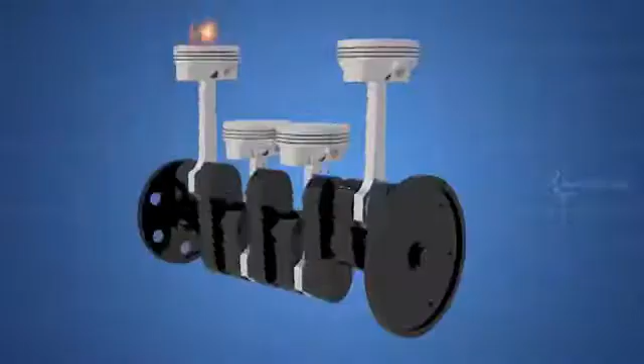Let's see how a car engine cooling system works. A car engine is basically an internal combustion engine where power is generated through expansion of high temperature and high pressure gases. A lot of heat is generated due to the combustion gas and the friction of mechanical parts. For sustained operation, this excess heat should be removed from the engine and kept at operating temperature.

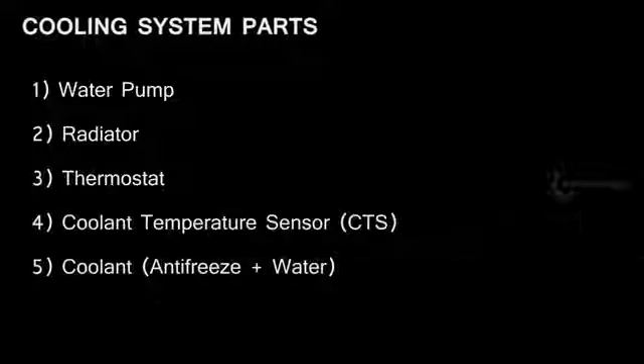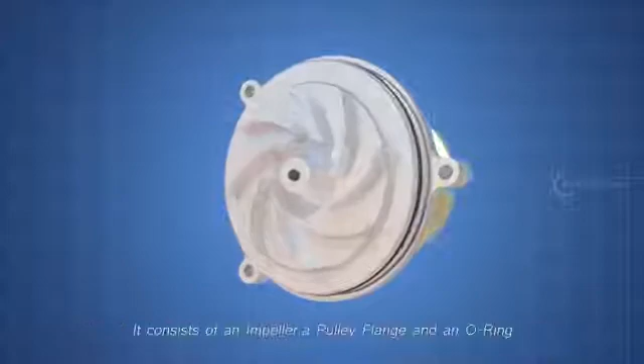Now let's see the parts involved in cooling the engine. The main parts for cooling the engine are water pump, radiator, thermostat, coolant temperature sensor, and coolant. First, the water pump. Water pump is the heart of the cooling system, which pumps the coolant. It consists of an impeller, a pulley flange, and an O-ring. The impeller is driven by the engine drive belt through a pulley.

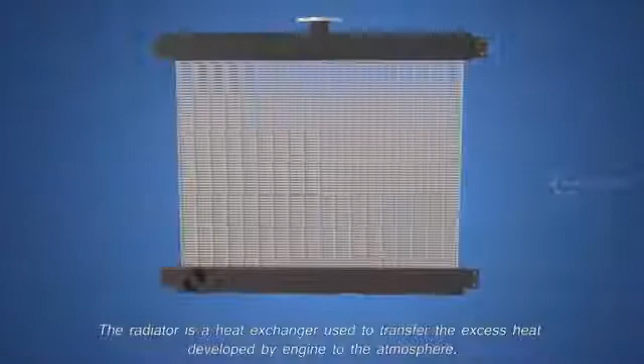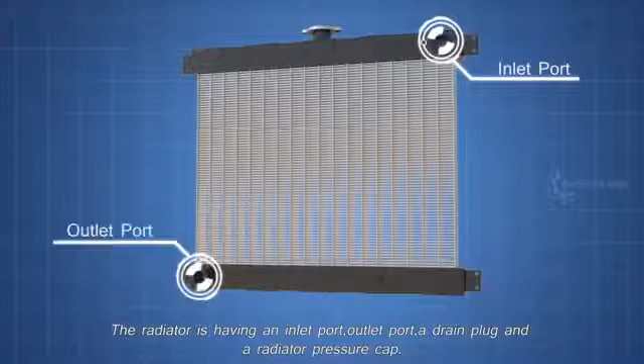Next, the radiator. The radiator is a heat exchanger used to transfer the excess heat developed by the engine to the atmosphere. The radiator has an inlet port, outlet port, a drain plug, and a radiator pressure cap. The radiator pressure cap plays a vital role in the cooling system, which will be explained later.

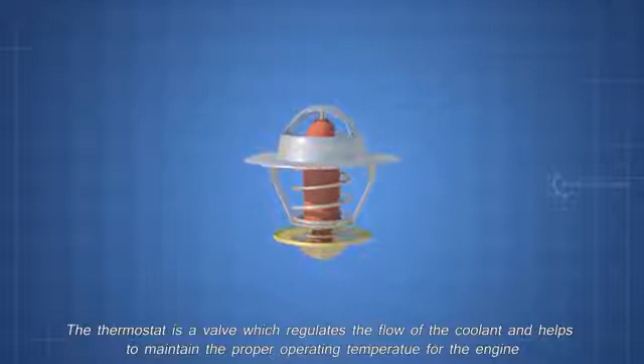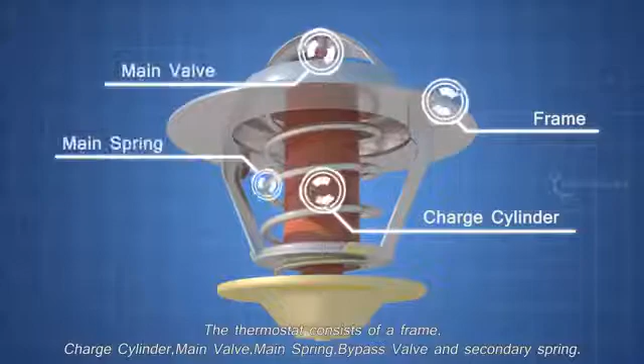Next, the thermostat. The thermostat is a valve which regulates the flow of the coolant and helps to maintain the proper operating temperature for the engine. The thermostat consists of a frame, charge cylinder, main valve, main spring, bypass valve, and secondary spring.

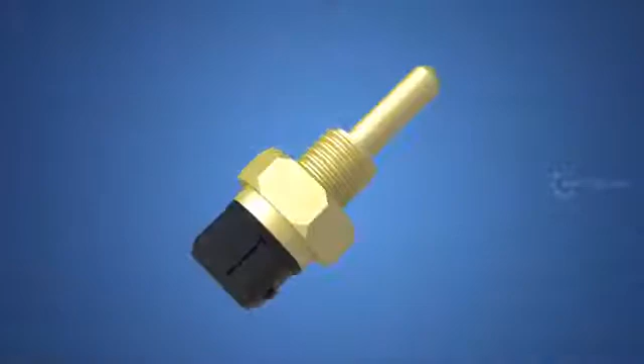Next, the coolant temperature sensor. The coolant temperature sensor is used to monitor the engine temperature. The ECU will use this data to manage fuel injection and ignition time. Some engines have more than one coolant temperature sensor. The data is also used to control the radiator fan and to update the temperature gauge on the driver console.

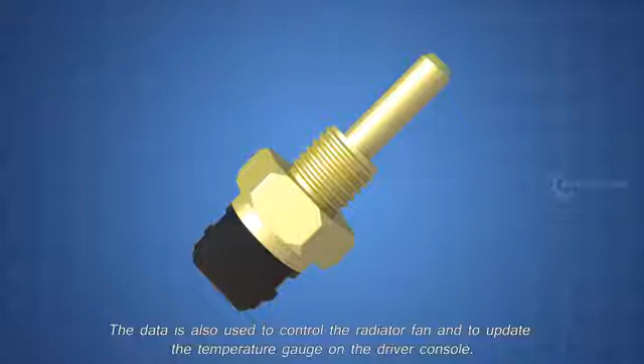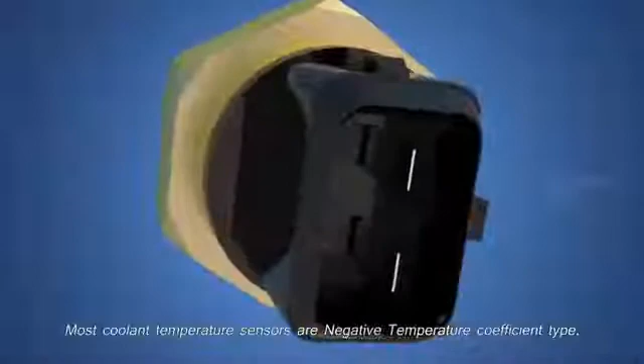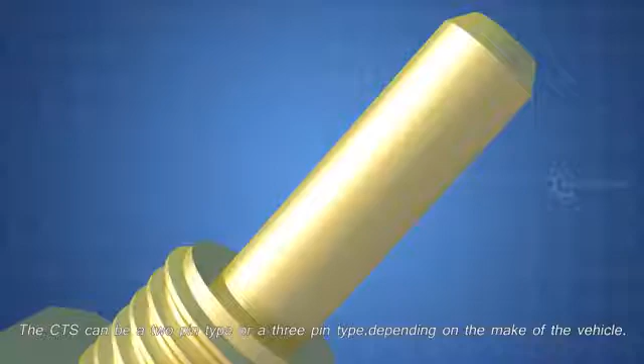The coolant temperature sensor consists of a sensing probe and an electrical connector. Most coolant temperature sensors are negative temperature coefficient type, which means as the temperature increases, the resistance will decrease. The CTS can be a 2-pin type or a 3-pin type, depending on the make of the vehicle. These are the main parts involved in an engine cooling system.

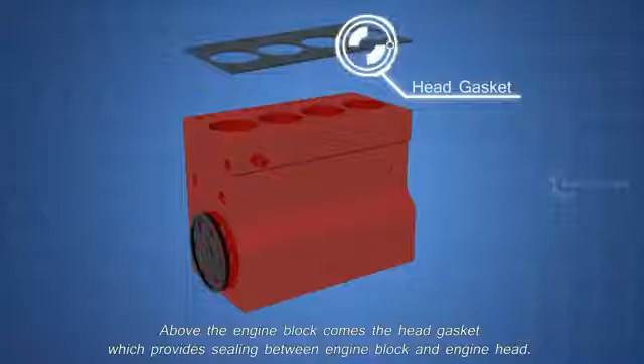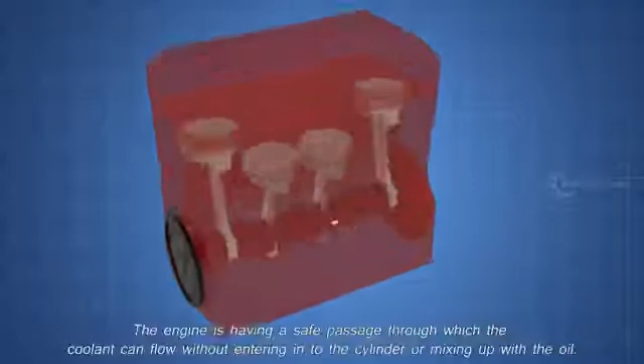Now, let's see how these parts work together. The pistons are contained inside the engine block, in which each of them will function. Above the engine block comes the head gasket, which provides sealing between engine block and engine head. It avoids compression leaks and oil or coolant leaks into the cylinders. Above that comes the engine head. The engine has a safe passage through which the coolant can flow without entering into the cylinder or mixing up with the oil. This passage is known as the water jacket.

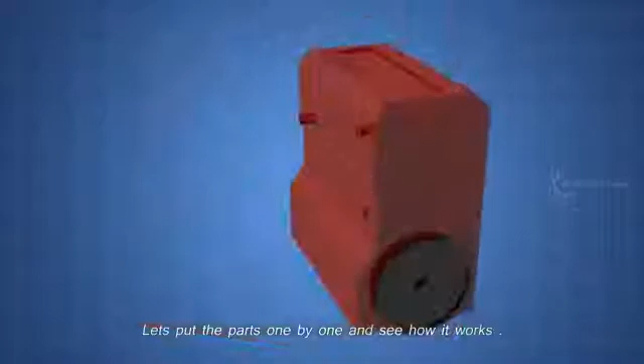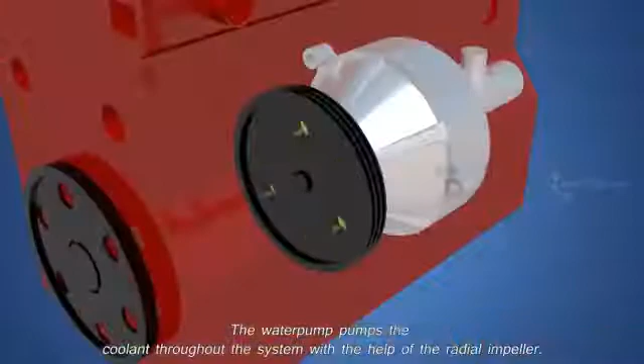Let's put the parts one by one and see how it works. The water pump pumps the coolant throughout the system with the help of the radial impeller. It is driven by the engine itself, using a serpentine belt. The serpentine belt also drives the power steering pump, alternator, and AC compressor. But for now only the water pump is shown.

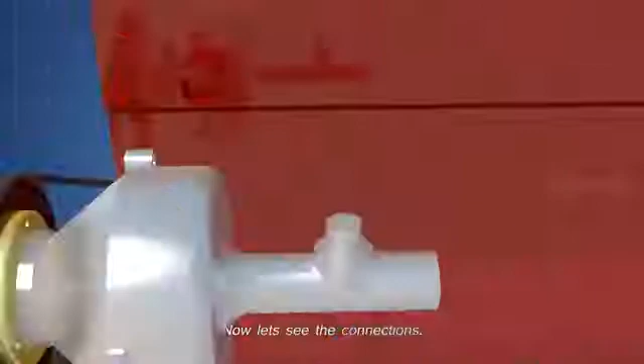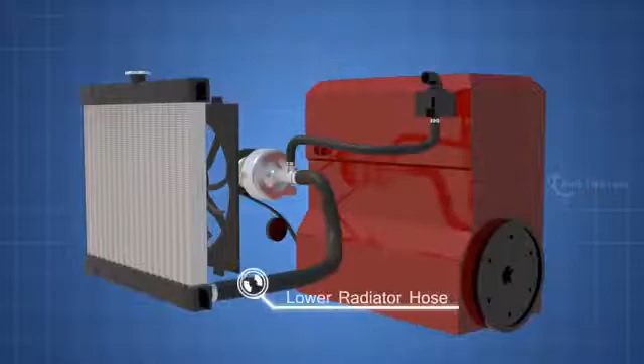Now let's see the connections. The thermostat bypass hose. The thermostat housing. Inside the thermostat. The radiator, and the radiator fan. The lower radiator hose. The water pump outlet hose. The upper radiator hose. The coolant expansion tank. The expansion bleed hose. Coolant overflow hose. So, finally, let's get into the working, starting with the thermostat.

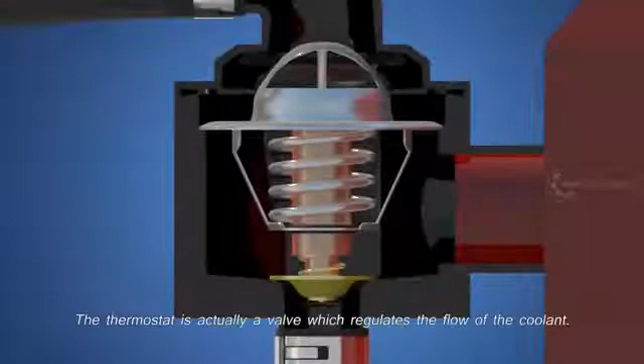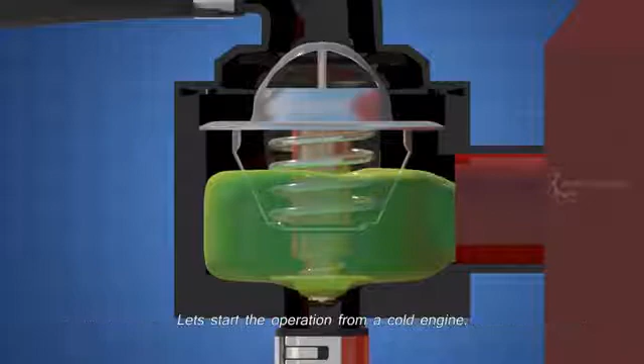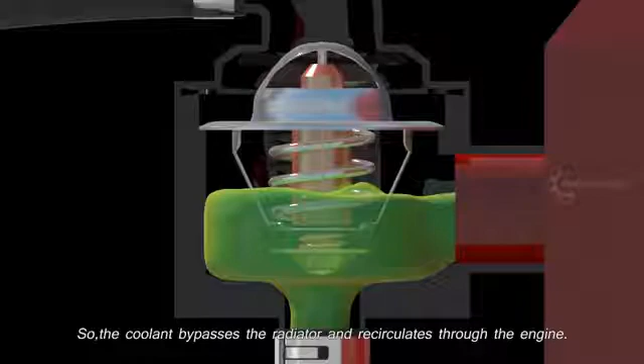The thermostat is actually a valve, which regulates the flow of the coolant. It will always be covered in the coolant, so that the temperature can be sensed. Let's start the operation from a cold engine. When the engine is cold, the bypass valve stays open. So, the coolant bypasses the radiator and recirculates through the engine. This helps the engine to heat up to operating temperature quickly. Eventually, the coolant temperature increases by absorbing the heat from the engine.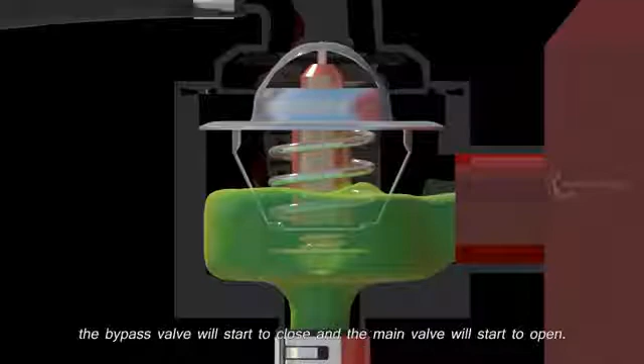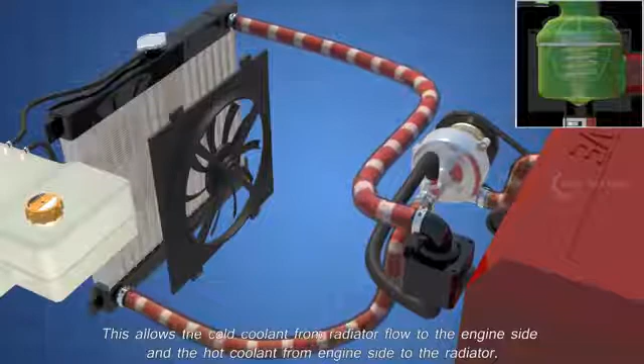Once the coolant starts to reach higher temperature, which is usually between 160 to 190 Fahrenheit, the bypass valve will start to close, and the main valve will start to open. This allows the cold coolant from the radiator to flow to the engine side, and the hot coolant from the engine side to flow to the radiator. In most cars, the coolant temperature sensor is located near the thermostat housing. It will turn on the radiator fan if the coolant to the radiator side is at high temperature.

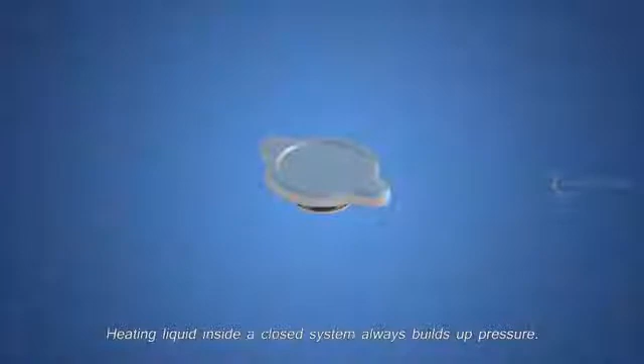Now, the hot coolant in the radiator will release its heat to the atmosphere with the help of the fan. At the same time, the cold coolant received from the radiator will start to absorb the heat from the engine for the next cycle. Heating liquid inside a closed system always builds up pressure. So, how to maintain the pressure? Here comes the role of the radiator pressure cap.

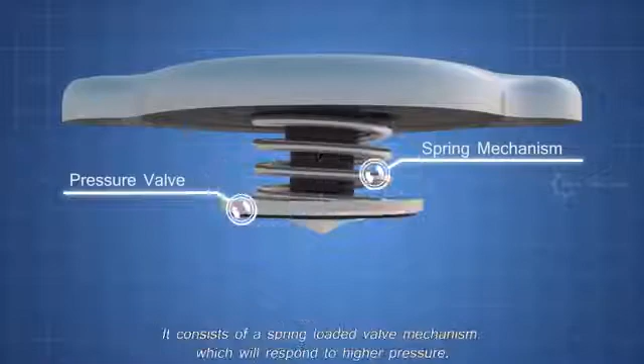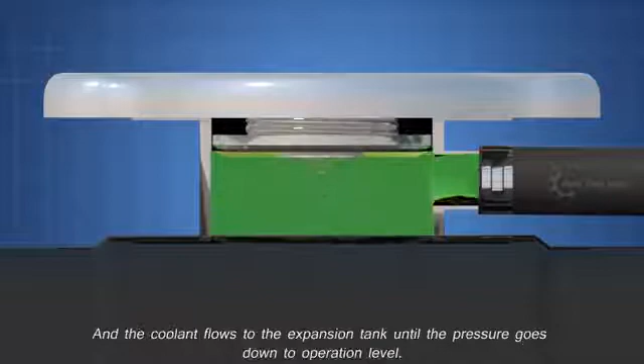It consists of a spring-loaded valve mechanism, which will respond to higher pressure. Reaching a pressure above 15 psi will push the pressure cap valve, and the coolant flows to the expansion tank, until the pressure goes down to operation level. And when the system cools down, the vacuum inside the system sucks back the coolant from the expansion tank. In case there is too much pressure buildup in the system, due to trapped air or other failures, the coolant in the expansion tank will be pushed out through the overflow hose.

The car heater system is a part of the engine cooling system. The heater system comprises the heater core, inlet and outlet hoses, and a heater control valve, which is optional and cannot be found in all vehicles. The heater core acts as a radiator, dissipating heat from the hot coolant to the vehicle interior, using a blower.